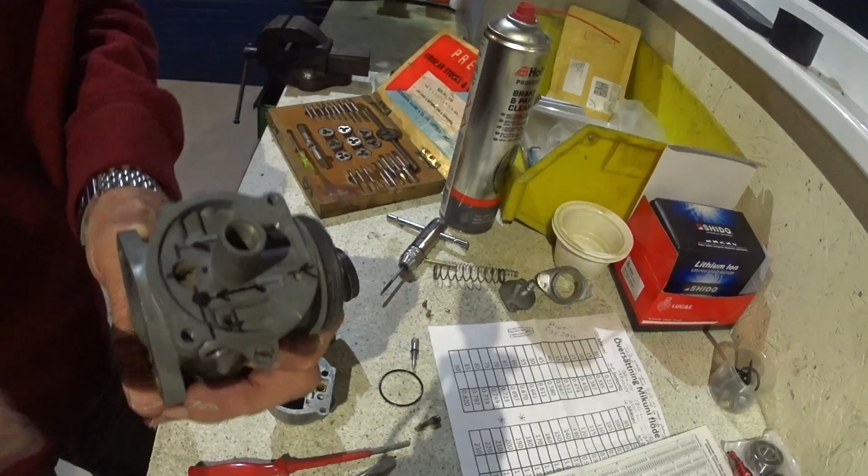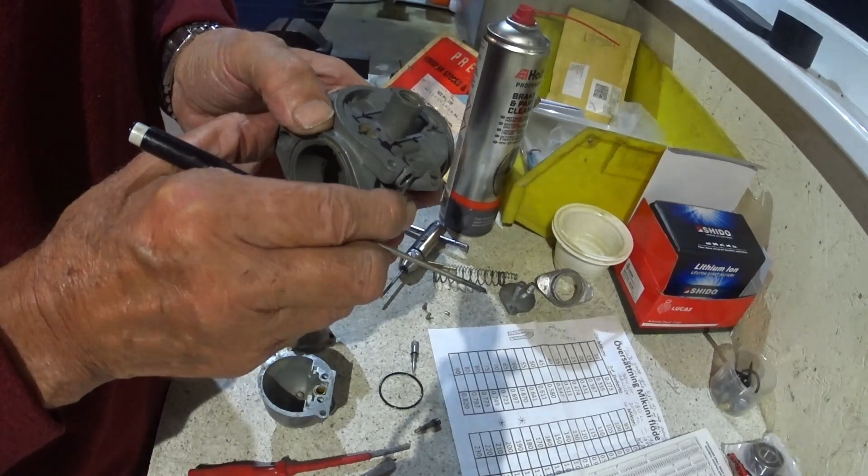So let's have a look. I'll just show you what I found. So this is an old carburettor which had water in, and it even had that much water in it over winter. Not while I owned it, by the way. That little brass core plug had burst out, so it was scrap anyway. And also the float bowl had holes in it where water had sat there, and you know, electrolysis, galvanic action.

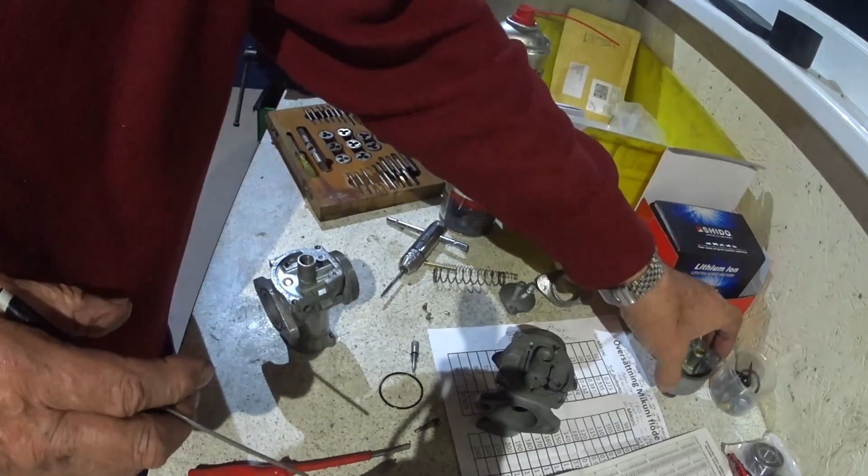So we'll start at the float chamber. Dependent on whether it's a right or a left-handed carb, those two go all the way down into the float chamber. So left or right-handed, fuel comes up to here from the float chamber. Then when it gets to the head of the carburettor, it goes down this hole here. I'll just use the other one because I've been drawing on it. So it comes up through this hole here, the fuel.

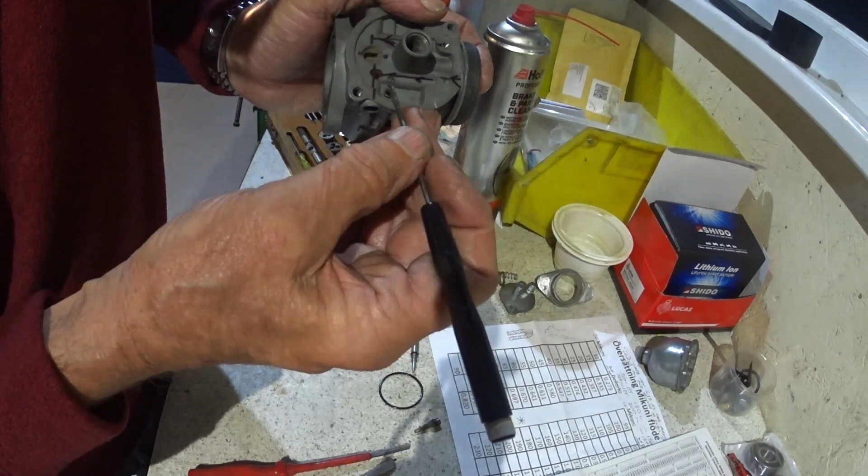It comes down this drilling and it's blanked off there. So it's drilled and then blanked off. So fuel goes down there, through this gallery, and it comes to a turning point here, because this is where the pilot screw adjustment is, and that's drilled in that direction. So we've got fuel coming in this way. And also if you look at the back of the carb, we've got this hole here, and that's the air coming in.

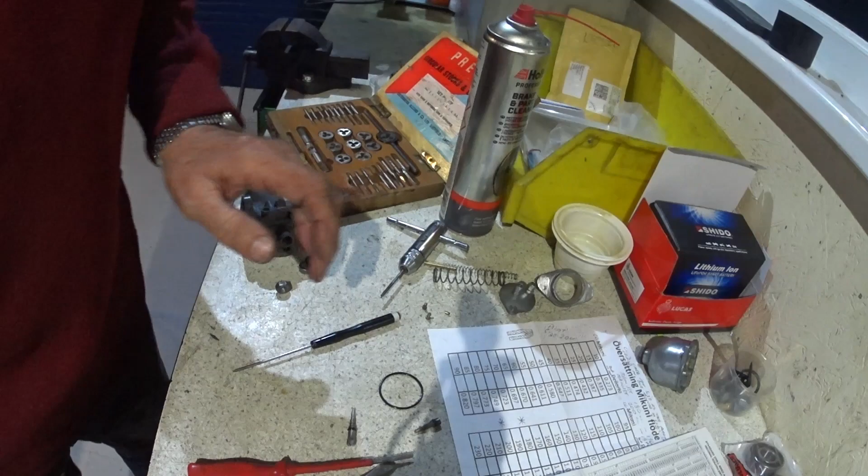So air down this one and fuel down this one, and they meet in this area here, and this is where the tapered seat is, where you control the amount of air which is coming in from here in regulation with the amount of fuel which is coming down here. So on the Mark 1s, they put down here a teeny little brass pilot jet. If I get the tweezers, I'll be able to show you that. Because it's that small, I even struggle to pick it up.

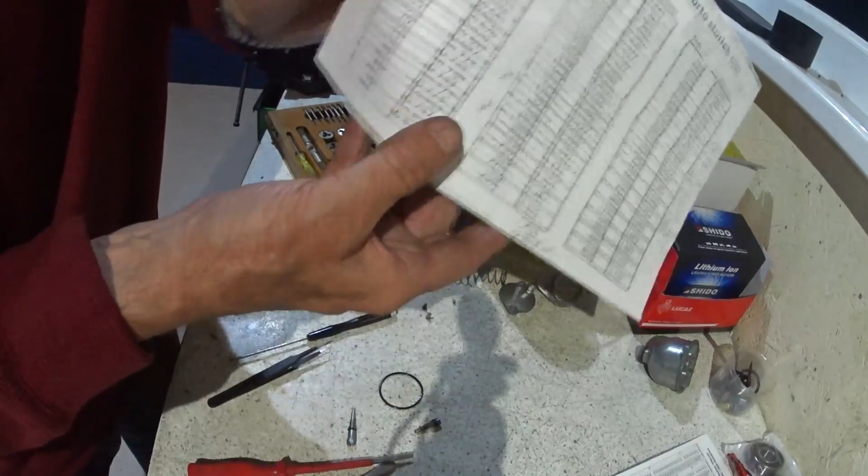So that's that pilot jet that sits round about there, just there, like that. And the way that it's drilled is like this. If I just show you on this, not a very good cross section, but that's the cross section of it. So it's got quite a large drilling up the back, and then there is your 20 cc's pilot hole.

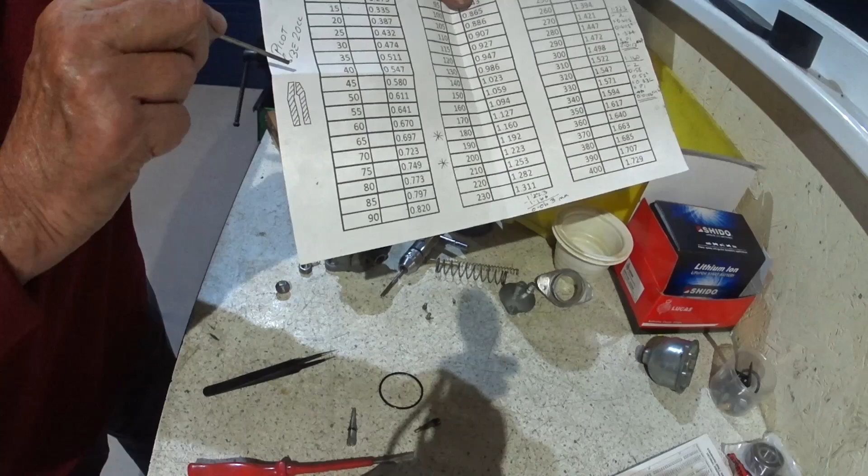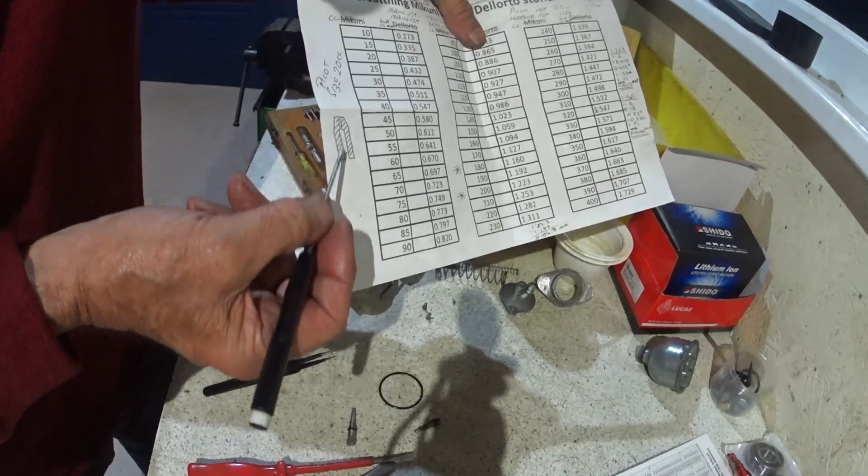So I must have ended up with debris in here. When I blew that way, it pushed it back and it didn't go round the corner and come out, so I could get flow. But when I blew the other way, it would still come through, but it must have been restricting in this bit here. And no matter what I did, I tried everything, I couldn't clear it. So I used this one as a test.

So I drilled out the blanking plug here. It's a blanking plug there that goes all the way through to where the pilot is, and then I got an appropriate sized drift, which would be the same diameter as this screwdriver. Let me find my vernier calipers. It's 2.4. You need a 2.4mm punch. So if you drill out, not on that one because that's the one that's going back on the bike because I've cleared that one.

So if you drill out the blanking plug opposite the pilot, just when it breaks through, stop drilling, get your 2.4mm punch, obviously with the pilot jet removed, the pilot air screw removed, and you can punch that little jet out. And there it is in its entirety, out.

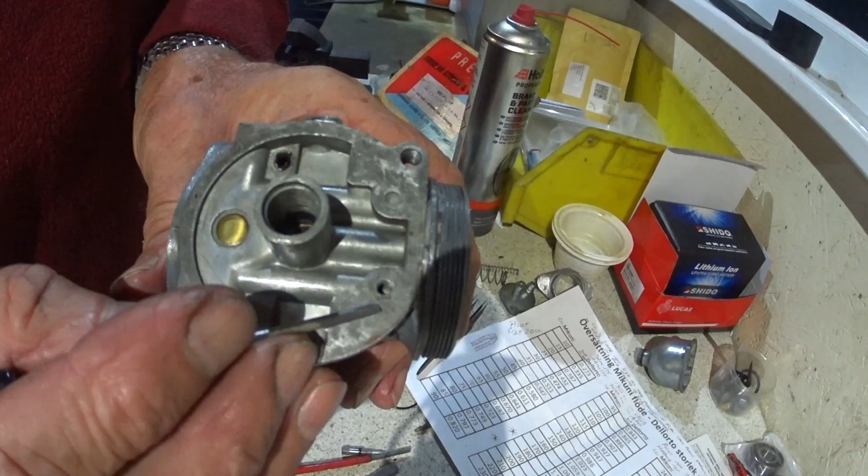But what they do is, you can't really see very clearly on that one, maybe on this one, yeah maybe, they actually kind of crimp it in three places. Doesn't do anything to the hole, but it allows you not to be able to screw a pilot jet in here that they have on the Mark 2s. But it is threaded, but the pilot won't screw in there.

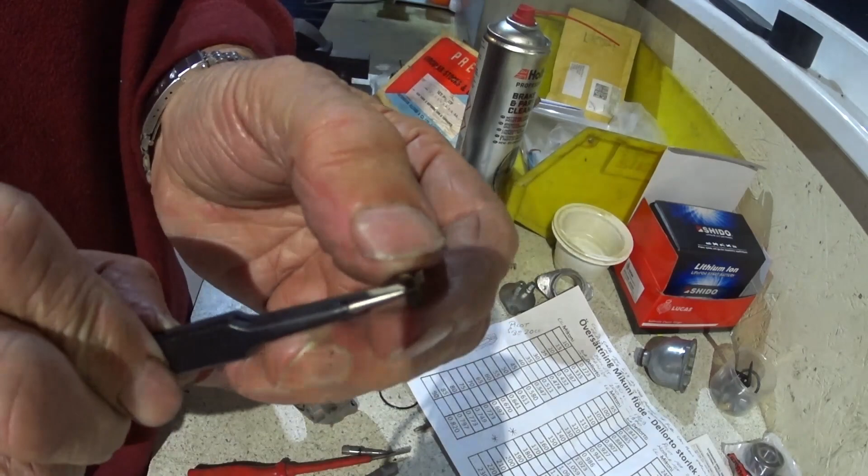So you need to get a 5BA tap, and you re-tap that hole out, and then you can get a Mark 2 Amal pilot jet. And that is the same value as the one that was in there, the brass bush. And I've got my piece of wire brush, single piece of wire, stainless steel wire brush.

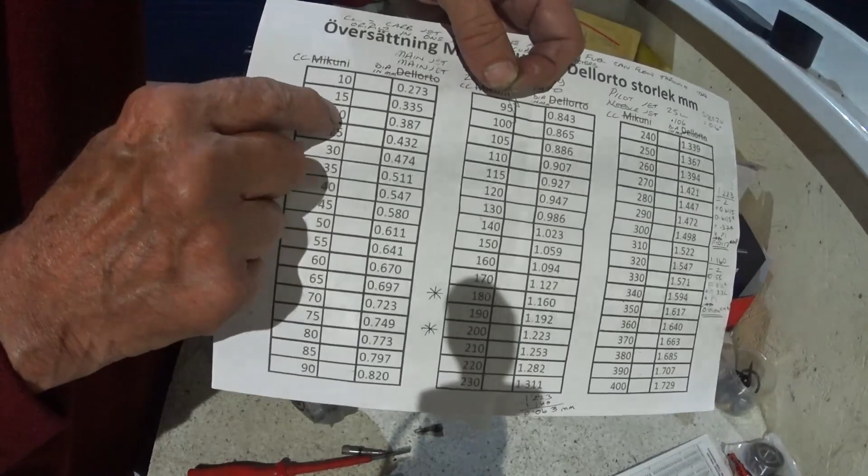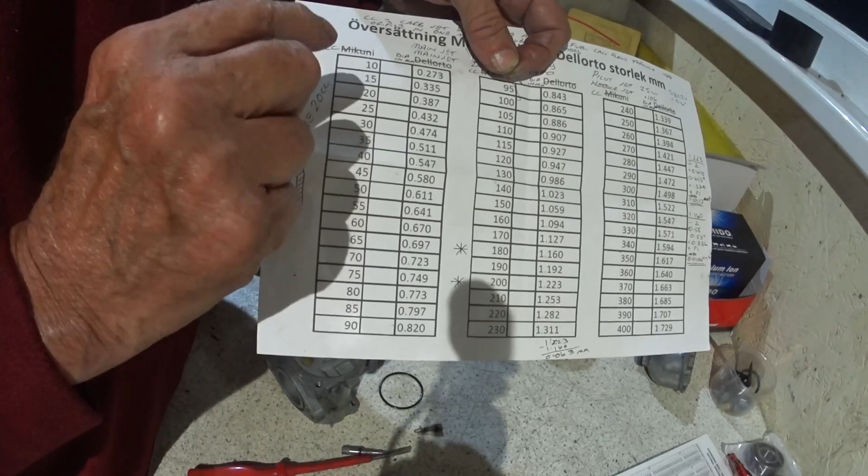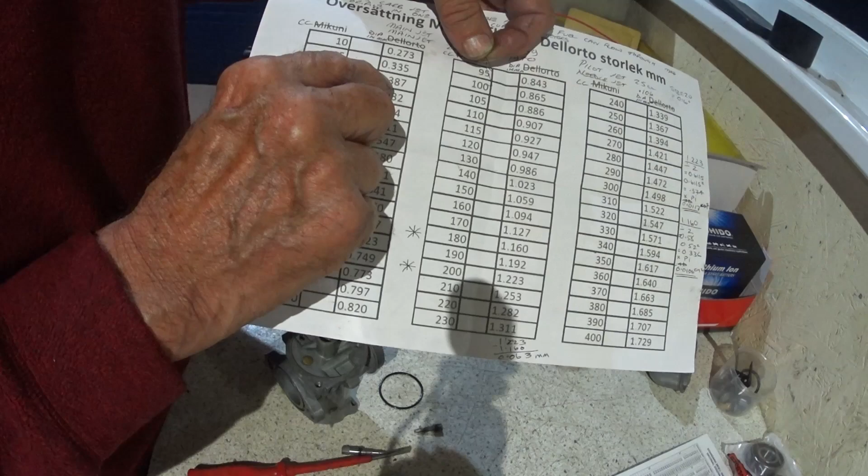If I measure that, that is 0.34 of a millimetre thick. And if you look at a 20cc's jet size, which is 20cc's of whatever liquid you're using, in this case it's for petrol, 20cc's of petrol will flow through this pilot jet or the other pilot jet in 1 minute, and the hole size for that is 0.387 of a millimetre. So this 0.34 odd is perfect. So you can check for sure that that is good.

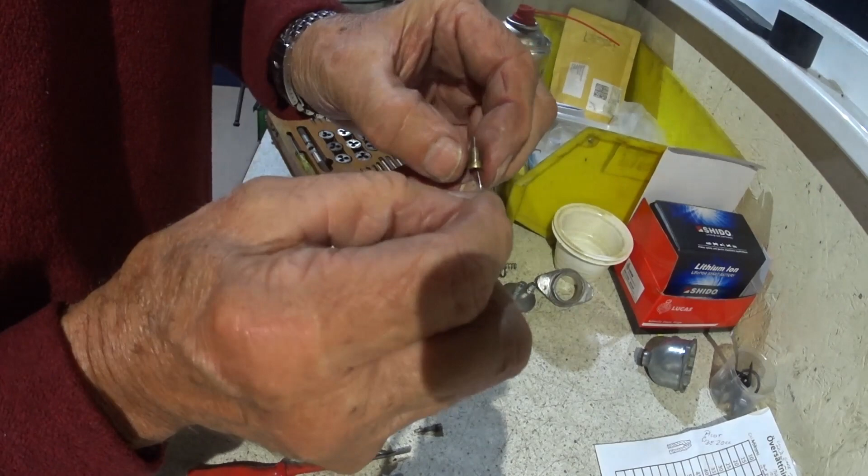And I could get my straight one, because I have a straight one of these as well, all the way down the pilot hole, and I knew that it was going through there. And that's with my glasses on. I knew that it was going through. Come on baby, there you go. I knew that it was going through there because I measured the depth. But in that bigger relief piece at the back, there must have been something in there that I couldn't get out.

So the modification is, you either drill this bush out from the pilot side so you can leave the blanking plug in place, obviously make sure you blow it all out afterwards, clean all the debris out, or you drill the blanking plug out and then you get a 2.4mm punch and you punch the old pilot jet out.

Then once it's out, now you can buy your Mark II 20cc's pilot. You can get your 5BA tap, clean those threads out where they've been crimped, and it's obviously so you don't end up realising, because you can't tell. Maybe you could if you could look down there, I don't know. So you can't put two pilots in. You can't have the pilot bush and this. So that's why them little crimp marks are probably there.

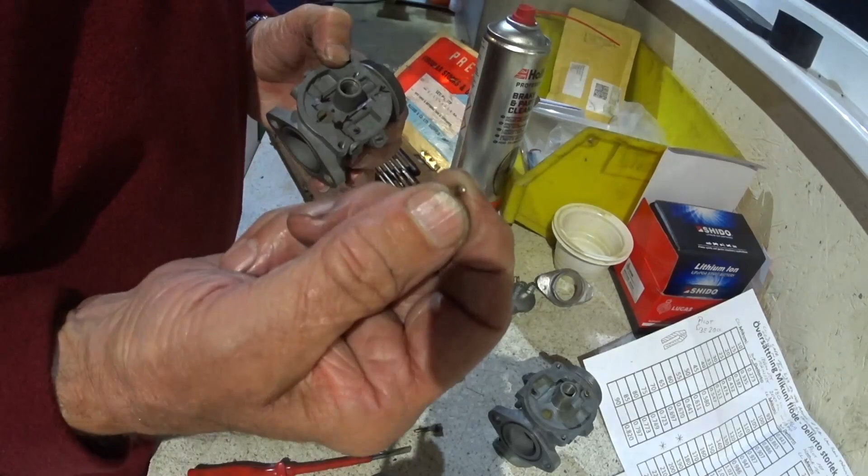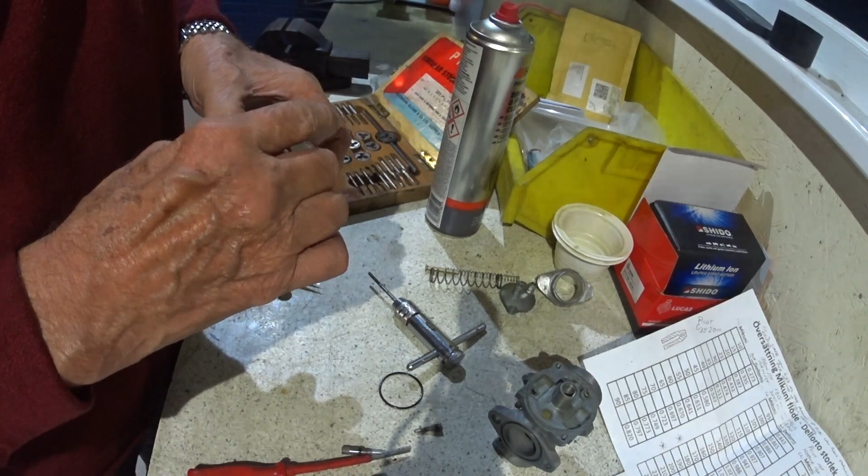So you can end up with debris in there stuck behind that little brass pilot bush that you cannot get out, even with an airline and the fluid, and you're going to end up drilling it out, knocking it out or whatever. But that is the fix to make it into a Mark II. Tap it out, 5BA, a number 20 or 20cc's, exactly the same rating as the bush, and we're away.

So I'm just hoping that on Tuesday, or Monday, when my slides come, I'll drop them in and we'll have a go at balancing them up and getting this thing running sweet, because there's no reason now why it shouldn't, because everything else is absolutely spot on, and I'm sure we're going to get there. So we'll see you on the next video next week when we give this the fine tune with the twin carbs.